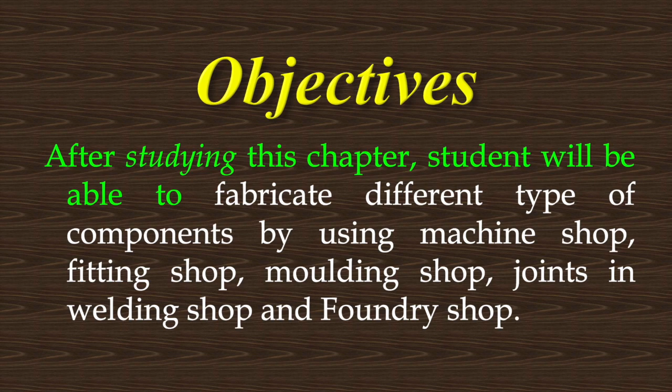Today I am going to discuss a new subject, workshop and manufacturing practices. Though here I am not mainly focusing on the manufacturing process, rather it is the workshop part. Though workshop is also a part of manufacturing.

This manufacturing means producing a new component of machines, new devices, or any object, maybe a bottle, a laptop, a mouse, a glass, whatever it is, all is under manufacturing.

Now, in workshop, what we are going to do? Mainly, the purpose of workshop is repairing and maintenance work. A place or room will be there where a number of machines will perform various tasks, like say you need to join two metal pieces with the help of welding.

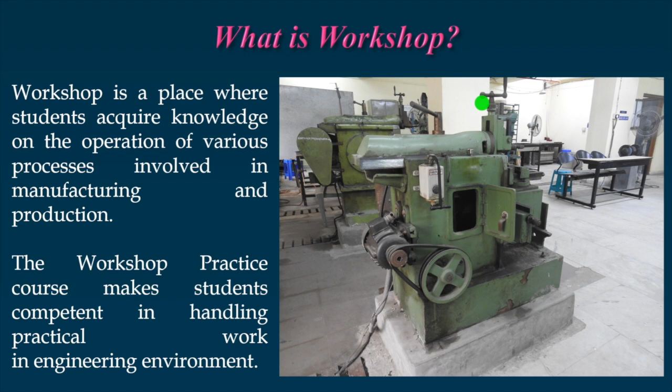Let's proceed to the topic now. This is the image of a part of our workshop. Now we have to study what different shops are available in our workshop at BPPIMT.

The different shops available in our institute are foundry shop, injection molding shop where an injection molding machine is there, electrical shop, electronic shop, fitting shop, welding shop, and machine shop, where a number of machines are available to perform the job, like turning machine, milling machine, drilling machine, grinding machine, and so on. Lastly, we also have a glass cutting shop where we will perform the glass cutting operation.

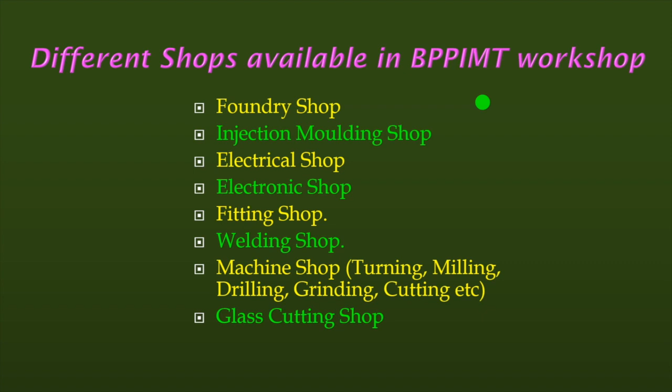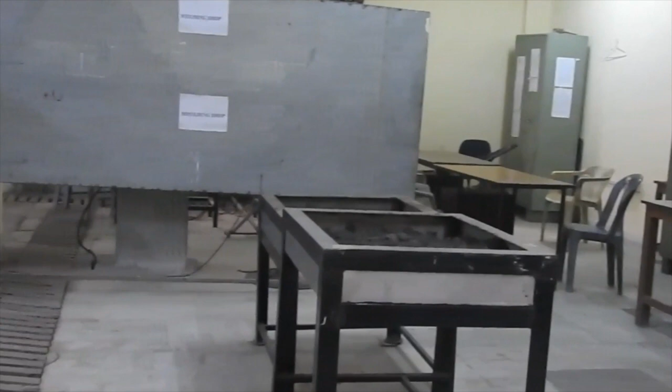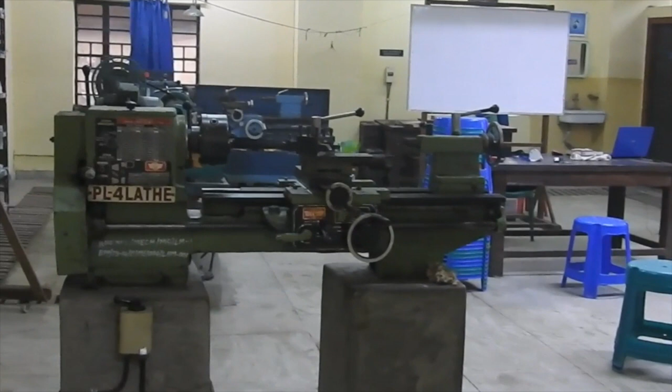Now let's have a look at the shops available in our institute. This is our workshop in the institute. We can see that there are a number of machines. This part of the workshop is the machine shop.

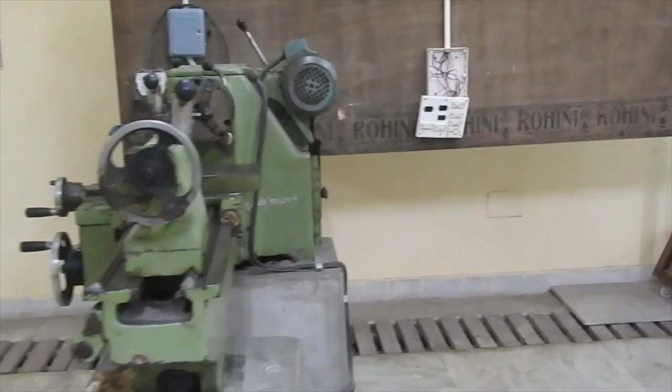The different machines are lathe machines. This is the three lathe machine, consecutive three lathe machines. Cylindrical jobs are performed in these lathe machines. This is the third lathe machine.

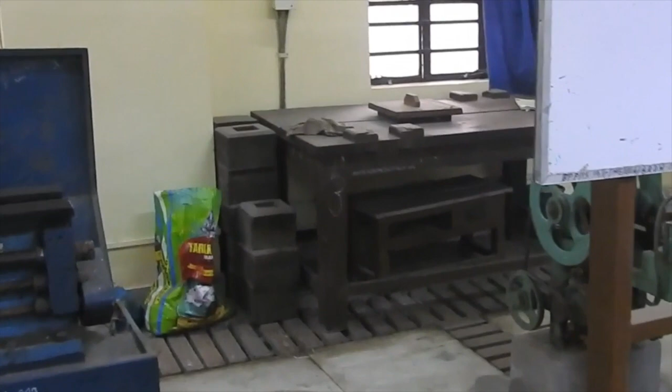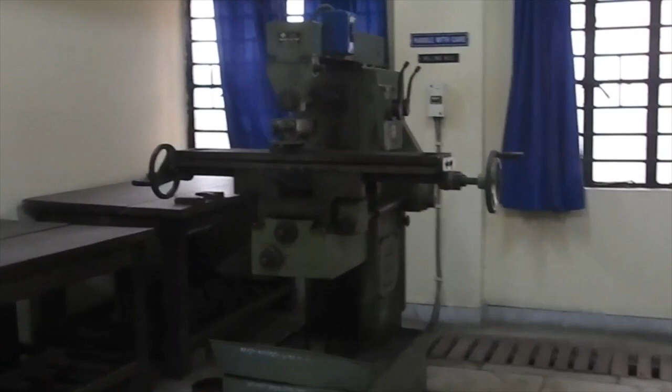This is the power saw machine using which we can cut the metal. The other machine is the milling machine. In the milling machine, a slot on the metal surface can be cut.

These two, this one is the shaping machine, and we have another shaping machine. Here the flat surface is being generated. This is the second shaping machine.

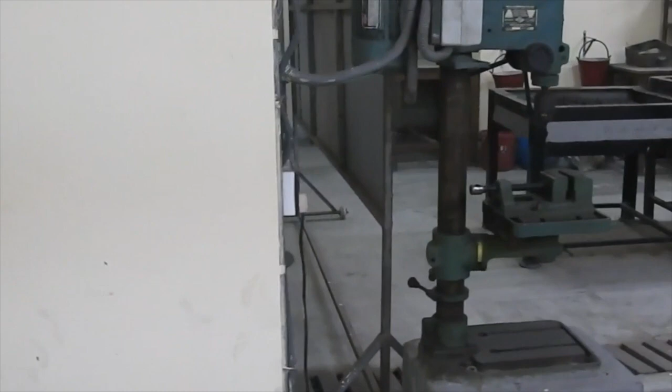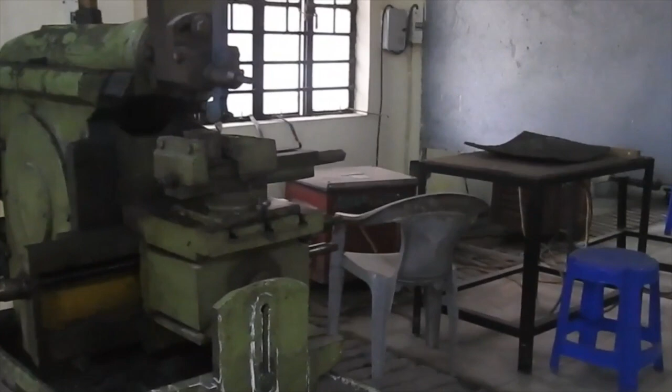This one is the drill machine, and we know that the circular hole is produced with the help of this drilling machine. We have two different arc welding setups.

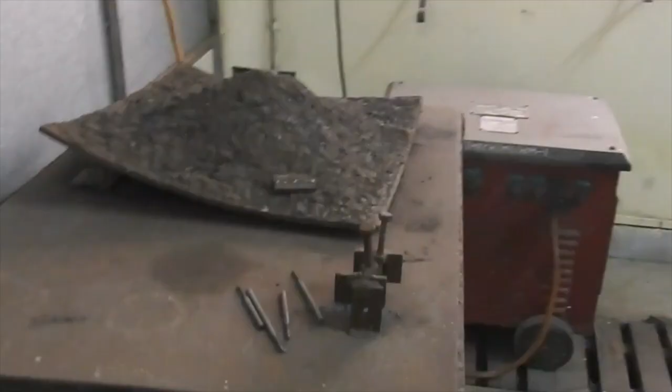So this is the welding setup. A welding metallic table is there, and then the welding machines. These two are the foundry setup.

We'll perform here the cavity production, meaning we'll make the hole of desired shape and geometry, and the complete casting product is not produced here.

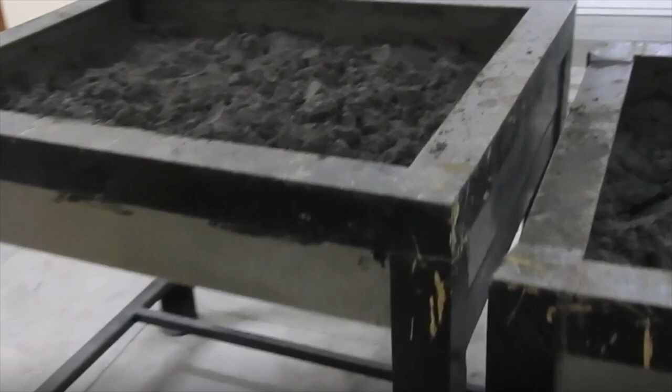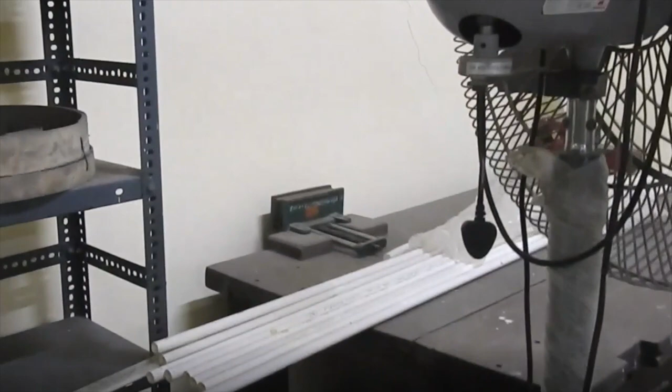This is the green sand that is required to produce the mould. The foundry tools are placed on the rack.

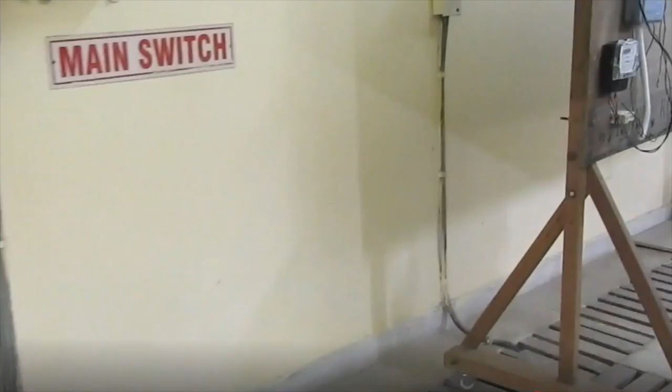Now this is the electrical shop. Here we'll practice the different connections and wiring systems of household wiring. A demonstration is presented here with various appliances commonly used in a house.

This is the injection molding machine. Plastics are injected to produce plastic products using this machine.

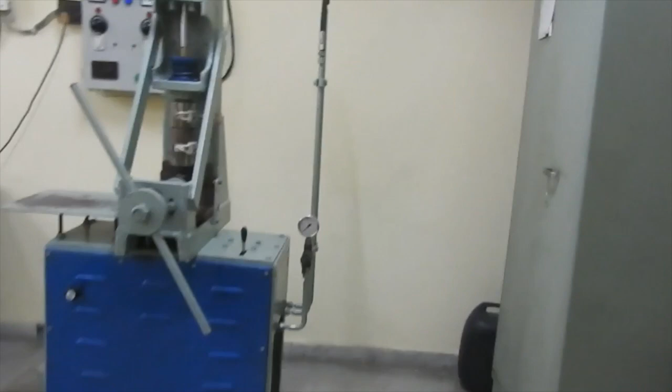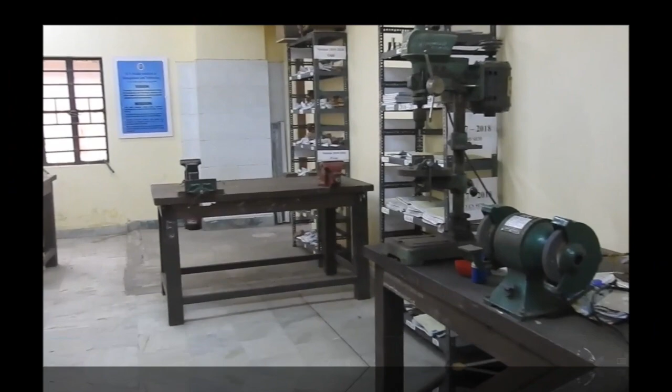This is our fitting and carpentry shop. Both fitting and carpentry jobs are operated on these tables. In each table there are two vices that are used to perform the job.

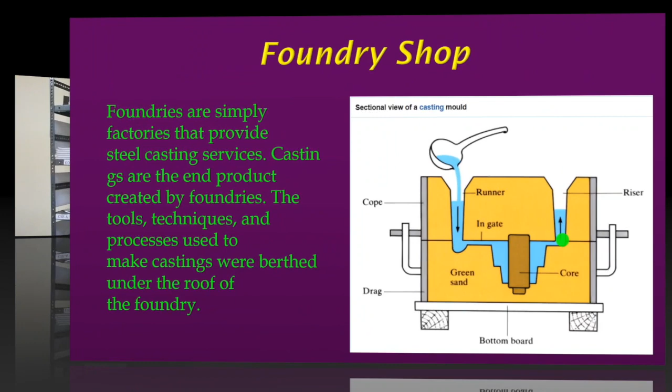Now I'm starting my discussion with the foundry shop. Foundry means this shop is used to produce casting products. Casting means what? Here we'll melt the metal, pour it into a cavity, allow it to solidify, and get the object.

Now what's the shape of the cavity? It is the same shape as the job we want to produce.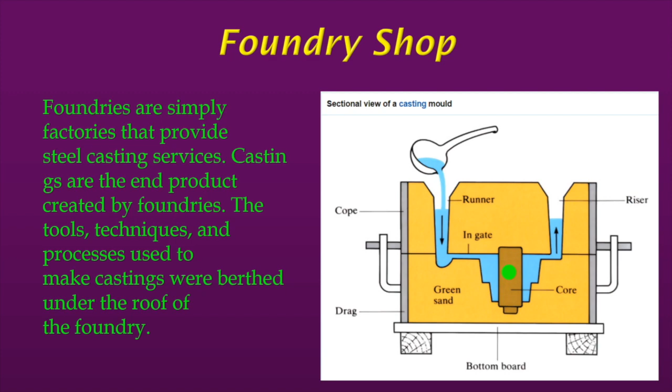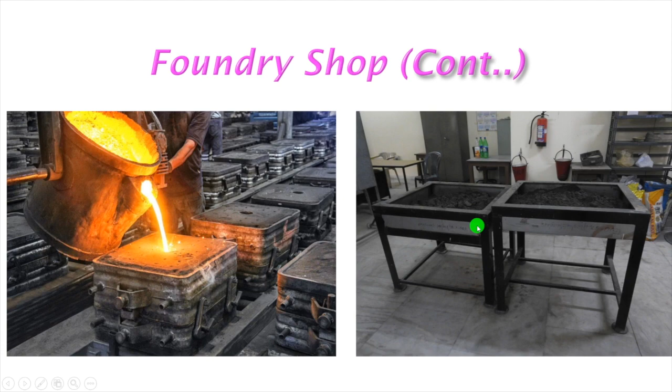There are different industrial applications of foundry shops. Here we can see that the molten, liquefied metal is poured into a cavity and then allowed to solidify. But in our workshop, we are not pouring liquid metal. Whatever cavity is required, that only will be produced in small scale on these two tables.

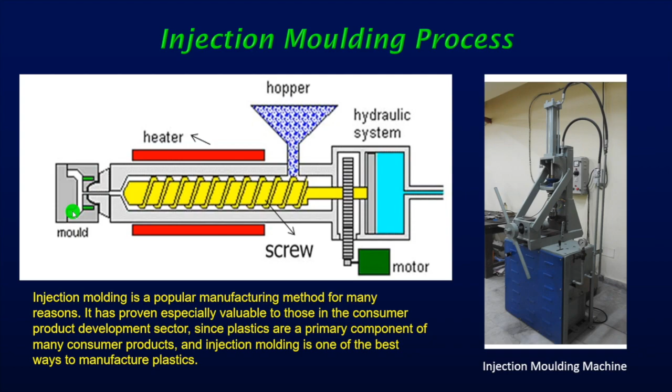Forming process: this part of the workshop is used to achieve different shapes of objects, especially metallic objects. That is, it may be the bending of sheet metals, and sometimes in village or roadside forging shops, they use a hammer where the hot metallic object is struck and gets its shape.

Or it is the rolling machine where the TMT bar or metallic wire is produced. So all these operations belong to the forming shop. Forming means we are getting the desired form of the metal using this shop.

Based on operation, the forming process can be classified as sheet metal manufacturing, forging, rolling, extrusion, wire drawing, and thread rolling. Sheet metal means we handle sheet metal, and some bending or cutting is required. In forging, hot metal is used, and by applying pressure we produce the job.

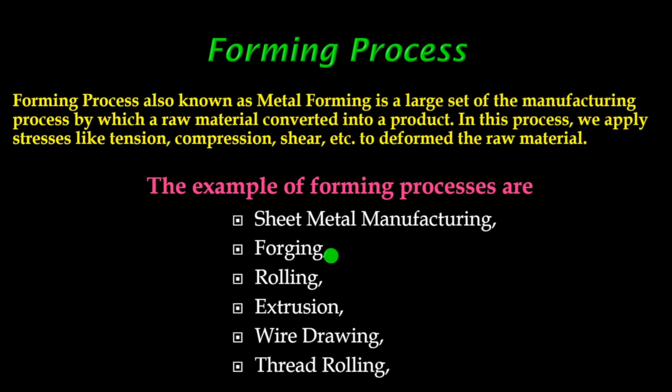Some of these processes in detail I will try to show here. Rolling is one of the very renowned forming processes.

In forming, the metals are never molten like in casting. In casting, metals are liquefied, but in forming, metal does not reach that temperature to melt; it is at high temperature so the metal is soft enough, and under different pressure or force we get the object.

In the case of a rolling machine, two rollers are there, and the metal is passed through these rollers, giving us the desired thickness.

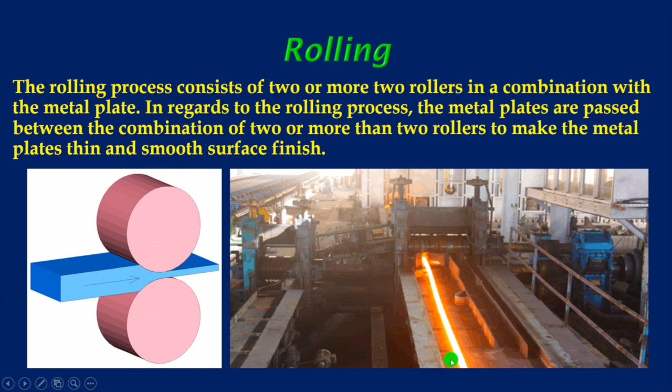In case of TMT bar, it is produced using similar rollers. On one side it is a bigger cube-shaped dimension of metal at high temperature, and on the other side we get the desired TMT bar or wire like this.

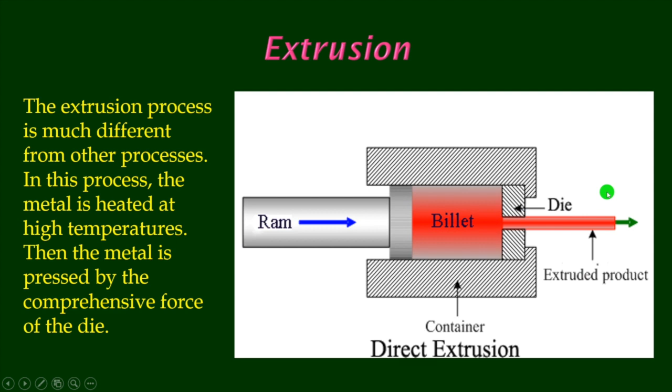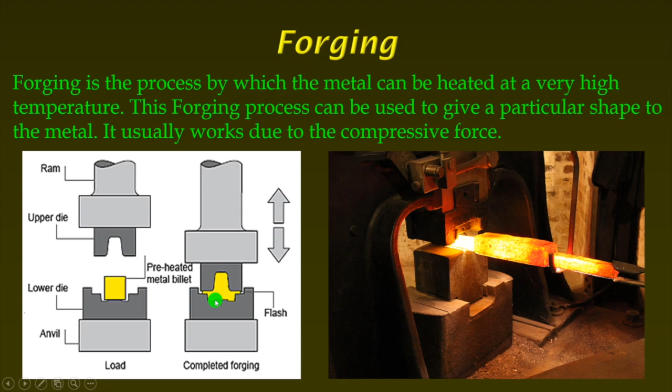Now, what types of cutting are there? Various types of cutting operations are performed, and for that different specialized machines are available. Some of the common machines in machine shops are the lathe machine tool, drilling machine, shaping machine, milling machine, boring machine, and grinding machine. I'll show here some common examples, few machines, in this presentation.

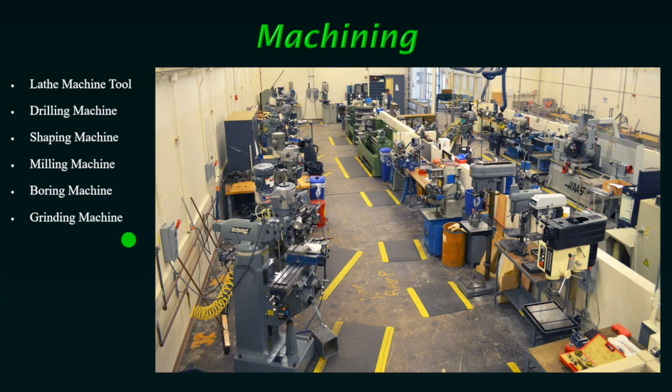First, I'm starting with the lathe, or lathe machine tool. Almost all cutting operations can be performed by a lathe machine. That's why it is also called a universal lathe machine.

All cutting operations means if you want to make a hole, it can be used. To make a flat surface, use this machine. To make a thread, to have a groove - almost all types of cutting operations can be done using this machine.

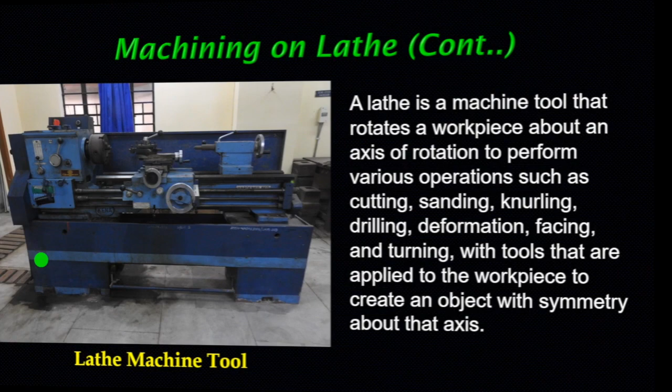Some of the common operations we do in a lathe are turning, taper turning, facing, grooving, parting. Apart from this, flat surfaces and drilling holes can also be done, but the lathe is specialized to operate on cylindrical jobs.

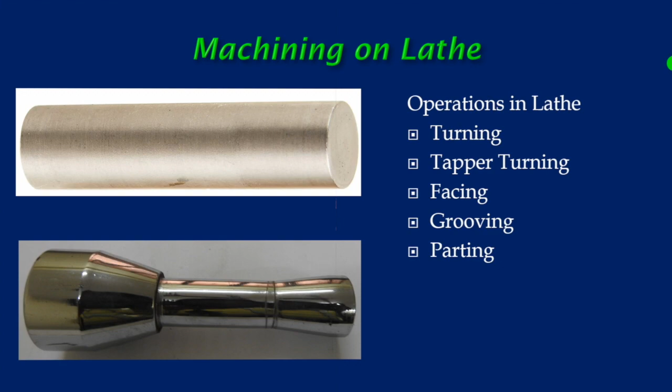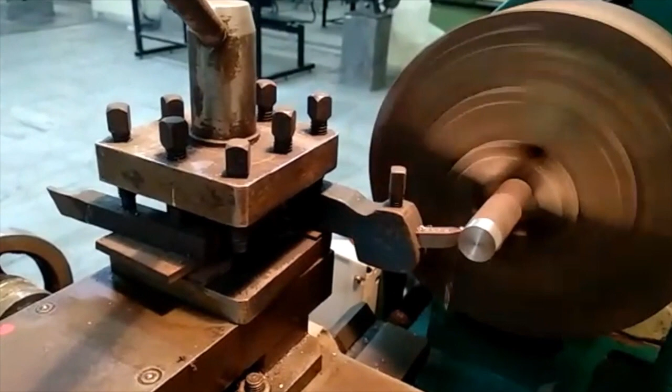Let's see a very short video of two operations: facing and turning. This is the facing operation. This is called the turning operation. To reduce the diameter of a cylindrical job, we use this particular operation. See, the diameter is reducing as our cutting progresses.

Shaping is another machine widely used in machine shops. The function of this shaping machine is to produce a flat surface.

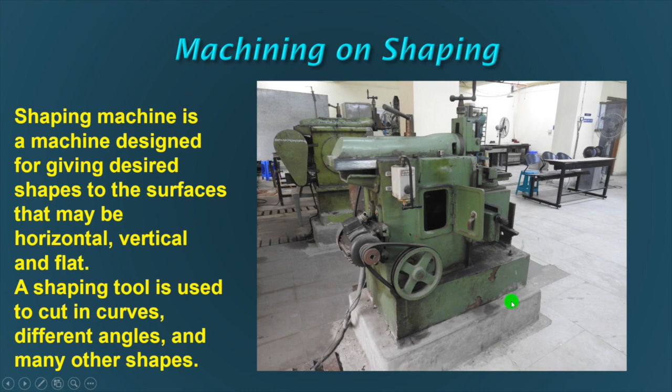The third important machine available in our workshop is milling. Using a milling machine, we can perform a slot on the surface of a metallic job. We can produce a slot, so the purpose of the milling machine is to produce a slot. Here a multi-point cutting tool is used to make it.

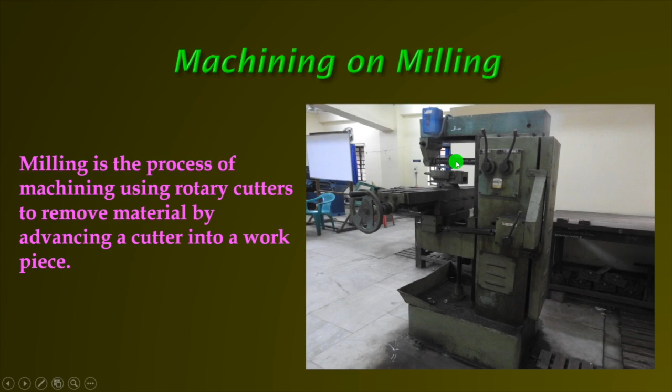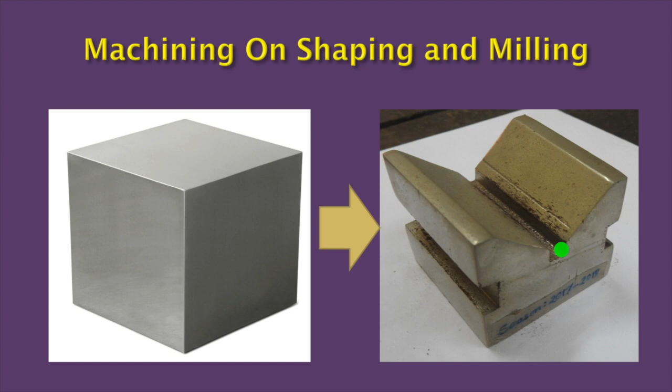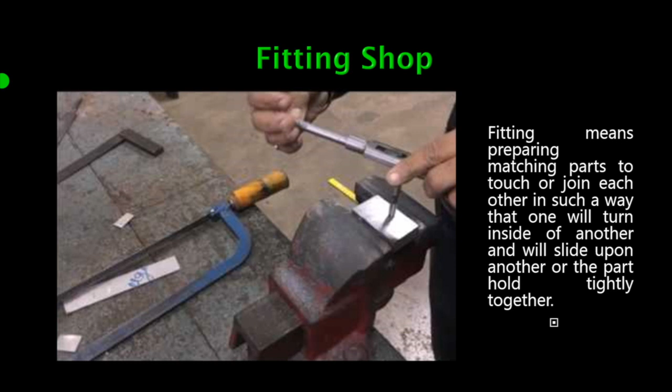The last shop present in our workshop is the fitting shop. Fitting means matching. If we need to fit or match a component with another component of a machine, machine parts, or any other places in the industry, sometimes it is not properly fitting, and that's why some work needs to be done. Some work means filing, rubbing, or making a hole using nuts and bolts. We make this tight. So all this matching or fitting operation is done in the fitting shop.

Now let's have a look at the fitting and carpentry shop in our institute. This is our carpentry and fitting shop. Here we perform both carpentry and fitting jobs. On each table, four vices are mounted. Out of the two is fitting vice, another two is the carpentry vice.

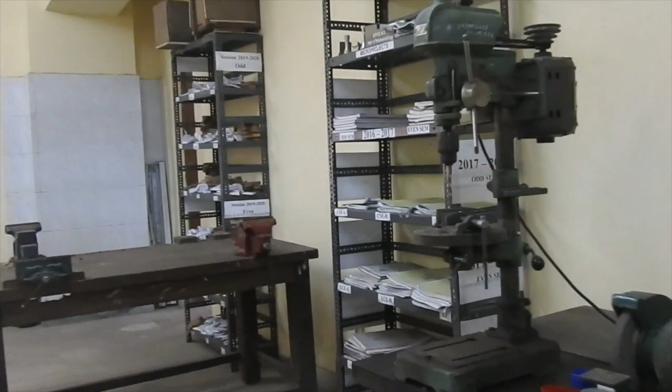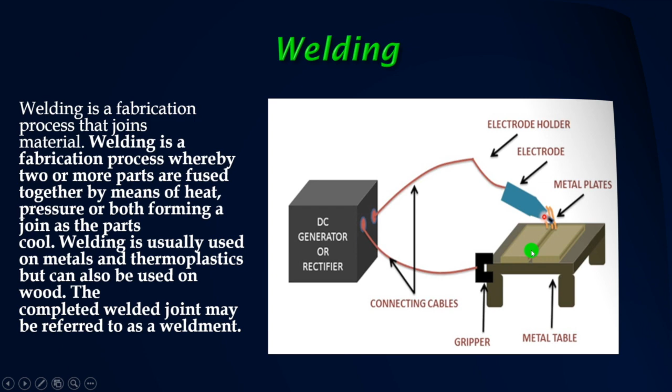I have already shown you this welding shop in our institute, and after performing the job, these two metals, also termed as the base plate, are joined like this. Here the additional metal is deposited and forms the joint. This additional deposited metal is known as weldment.

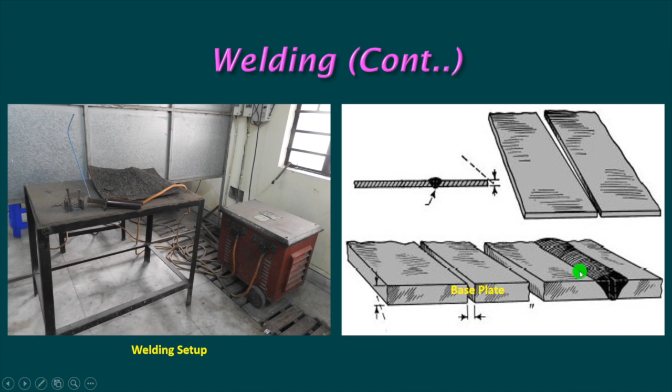Another similar method of welding is soldering. Both welding and soldering are metal joining processes. In case of welding, the base metal is also melted, but in welding, sorry, in soldering, our base metal is not melted. The soldering operation is done in case of electrical and electronic circuits.

Here this is the soldering iron. It supplies electricity and completes the circuit, and from this solder- the solder is an alloy of tin and lead- it is deposited between two copper pads, producing the joint, completing the circuit. When the circuit is completed, heat is generated. This heat melts the solder and it is deposited here.

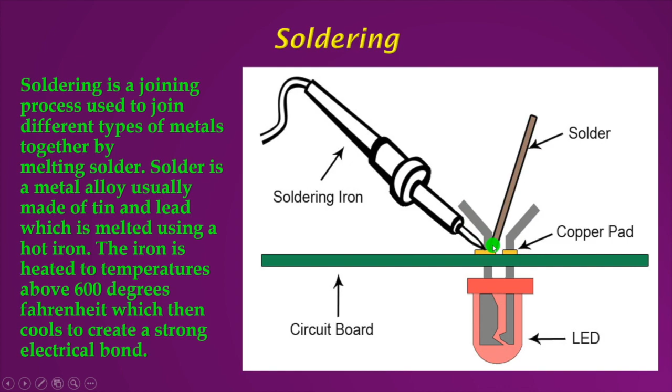In our electrical shop, we'll explain in detail how household wiring is performed, what are the connections, how the wires are designed, and other switches, the fuses, all this. This is the sample shown in our video tour of the workshop. I also have shown you this setup. This is the model of house wiring.

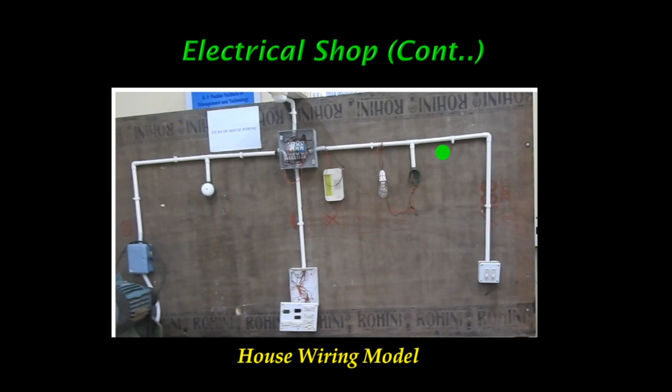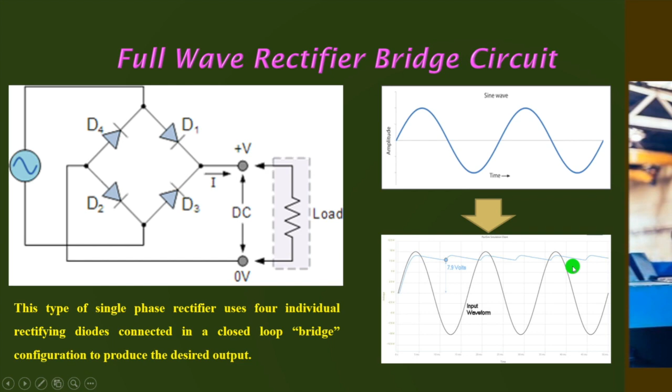Apart from this conventional machining and different shop work, nowadays some new and innovative advanced manufacturing is also included in the workshop. The advanced manufacturing includes 3D printing, robotics- mainly automation and robotics is used for this advanced manufacturing process.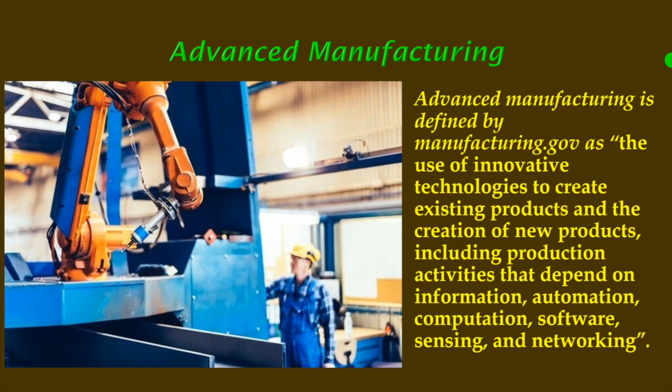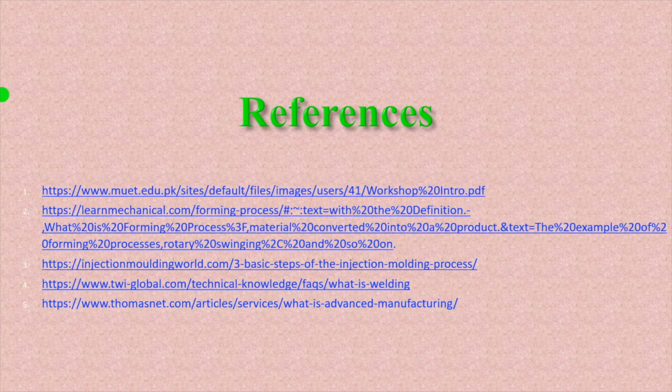So this is all about the discussion on the subject workshop and manufacturing practices. Here I'd like to mention that today in this introductory class I have only gone through the overview of different shops in the workshop, and in subsequent lectures I will go through the detailed operational methods and parameters of all the shops and different operations.